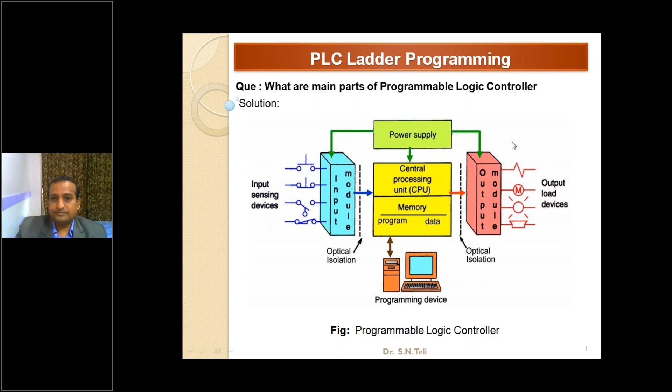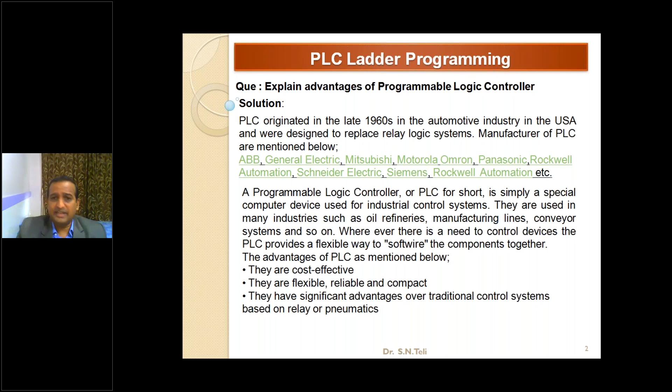Now the advantages of PLC are that it is cost effective. Cost is very less nowadays, flexible and reliable, compact. Okay, and many companies are there: ABB, General Electric, Mitsubishi, Motorola, Panasonic, Rockwell Automation, Schneider Electric, Siemens. Many companies are there. Even Indian companies are also available nowadays.

Okay, and latching I have already told. This is called a latching circuit. When S1 is on, the bulb is on. With B, the same name, the current is flowing on both sides. Even if S1 is off, the bulb is still on. When S2 is off, this is the push button I showed, it turns off. This is called latching. Latching is very, very important. S1 is a normally open switch. S2 is a normally closed switch.

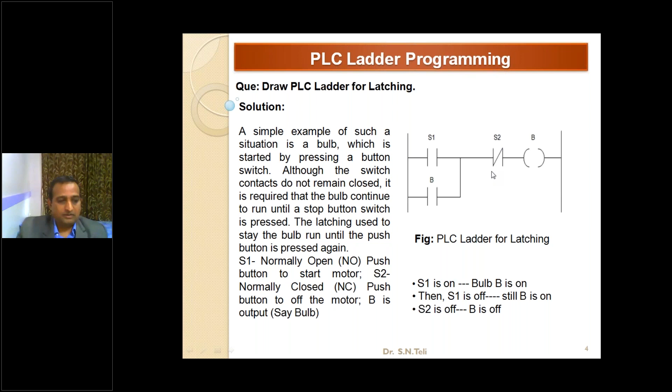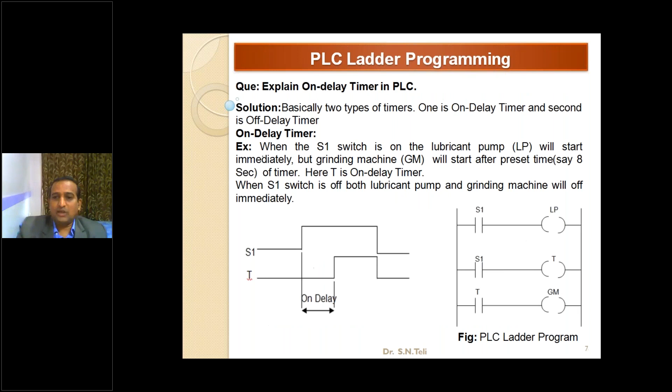And here A plus, A minus. A plus is the piston extending. When S1, A plus. When S2, A minus. Okay, so this is the PLC programming, ladder programming. And here A plus, A minus using latching, and here the on delay timer I have already explained, and the off delay timer, and the retentive timer where reset is required, and delay A plus, delay A minus. So this is A plus when S1 is on; when it goes to S2, the timer will start. When the timer gives the output, then A minus will retract.

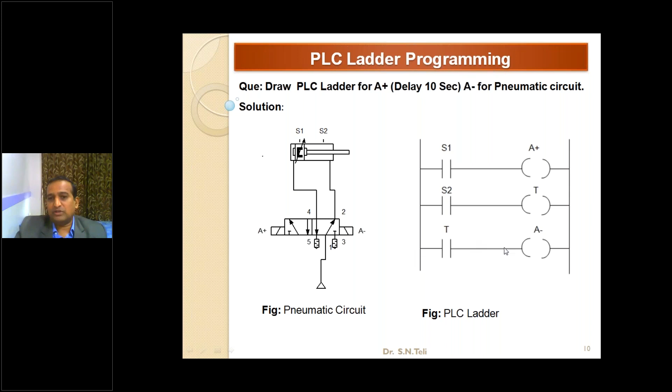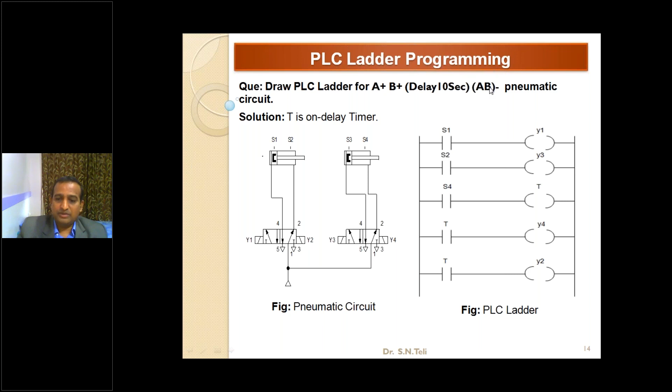So like this, I have developed many logics with 2 cylinders, not only 1 cylinder: sequencing of 2 cylinders, timers. And this is very interesting, slightly complicated: A plus, B minus, and A minus. And A plus, B plus, delay, AB minus. In the bracket, AB minus means at a time. Okay, I'll show the animations after the PPT.

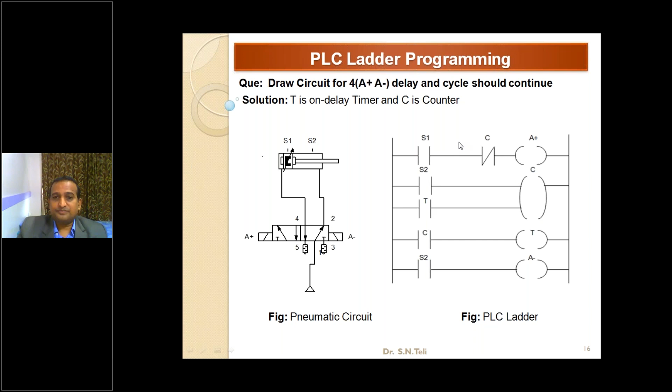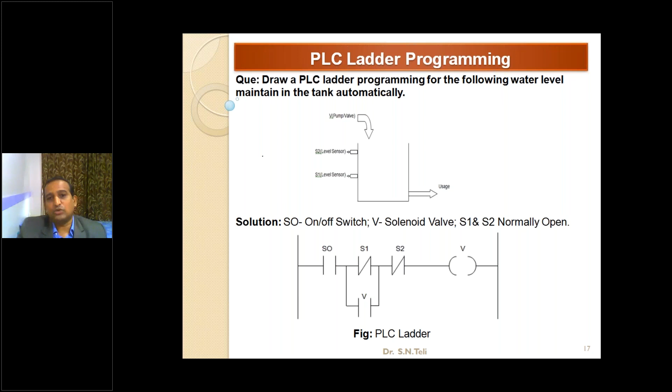So counting. Just now I showed the counting. You can do the same programming I showed in electro-pneumatics in the PLC also. And even for tank processing, maintaining the water level in the tank with S1 and S2, the pump will automatically start. There is no shortage of water, and so many applications.

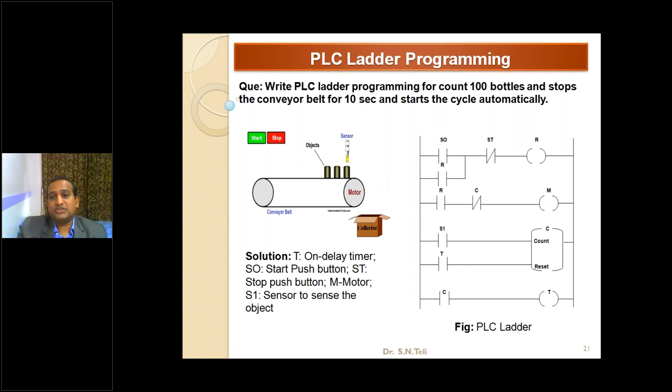So I have written the programs, and all the programs are run by software. I have checked and validated them with the software. So these are all, the stamping machine, PLC programming. And now we'll start the software.

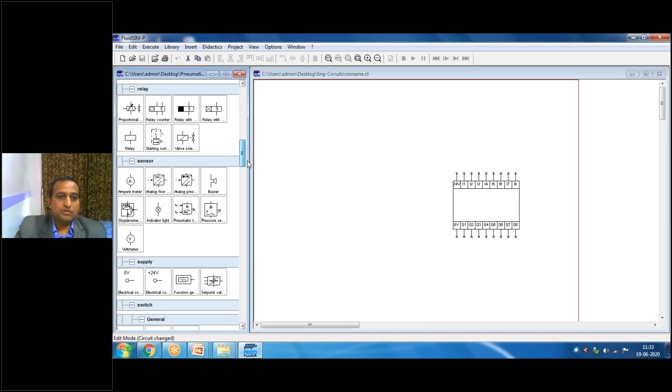Okay, so finally we have arrived at the PLC, programmable logic controller. Here the PLC is available. You can select any PLC. The PLC requires 24 volt and 0 volt. Without 24 volt and 0 volt it is not starting, because this is also a passive element, and it especially requires DC volt, not AC volt. 24 volt and 0 volt.

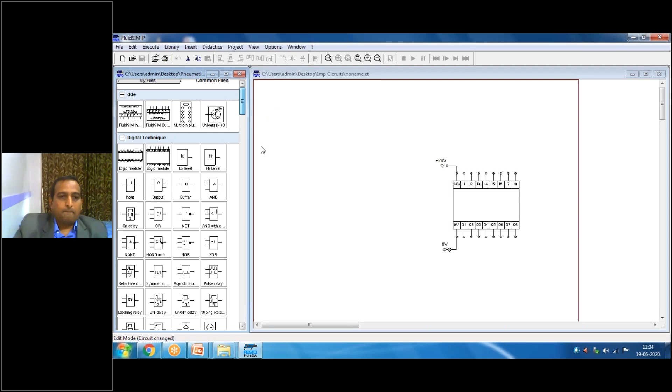Here it is showing I1, I2, I3, I4, I5, I6, I7, I8 are the inputs. Now I'll take a piston and cylinder, a double acting cylinder. Once again, I'll label S1 and S2, 0 and 100. For S1 and S2, suppose I'll take an inductive or a magnetic sensor. Here, magnetic sensor, S1 and S2.

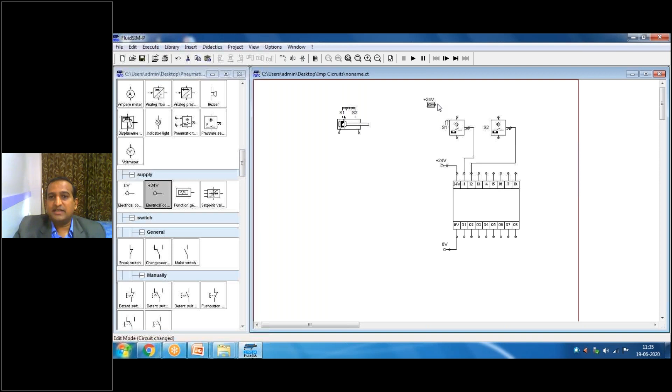In the sensor, there are 3 wires. This sensor is S1, this is called S2. This is the sensor output; the pulse is showing this output. I1 I have attached to S1, and I2 to S2. 24 volt and 0 volt are required for the sensor, and here also you can use the same 24 volt and 0 volt. This is the sensor S1 and S2. And here the valve is required.

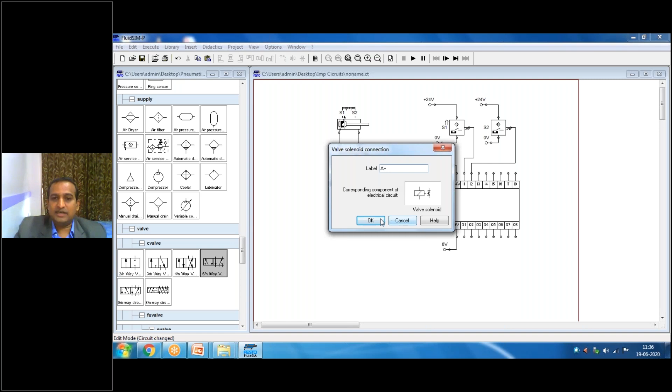This is the valve you are familiar with, 5x2. So I'll use a solenoid valve, 5x2. This is the symbol for solenoid. I'll write here A plus, and here A minus. And here I'll give the supply, compressor, and FRL unit: filter, regulating of pressure and lubricating the air. And here there is a muffler. Fine, A plus and A minus.

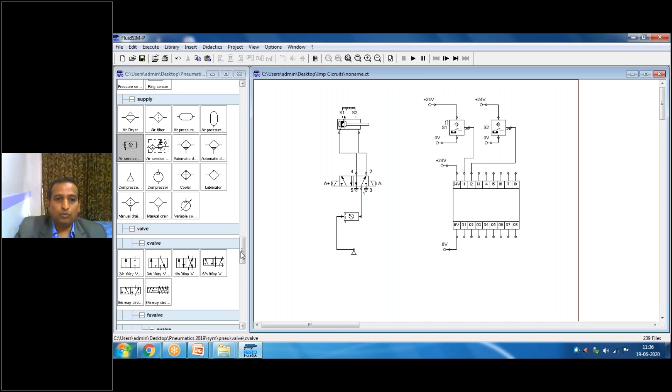These are the PLC inputs; I have interfaced inputs from the sensor. Then the output from the PLC goes to the solenoid valve. Here 0 volt is required, and naming is also required: here A plus and here A minus. Now you can see the PLC and the pneumatic system in one screen. I have interfaced the pneumatic system to the PLC; the inputs come from sensors and the outputs of the PLC are solenoids. But it is not working because it is just a black box.

You see here S1 is on now because of the magnetic piston and magnetic sensor. It is giving a signal to the PLC, but the PLC is blank now. You have to write the programming. What do you have to write? When it is at S1, A plus should be on. When the piston is at S2, A minus should be on.

Double click and you will get the ladder programming. I1 is nothing but S1. Q1 is nothing but A plus. I2 is nothing but S2. Q2 is nothing but A minus. The programming is over. You have written the program. Just come here. Now you see the operation by interfacing the PLC. PLC is very easy compared to pneumatic and electro-pneumatic.

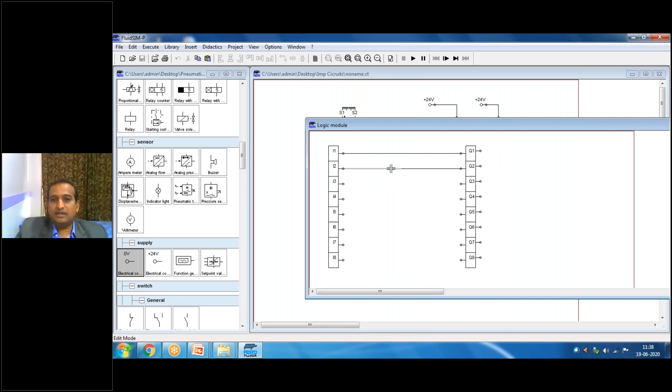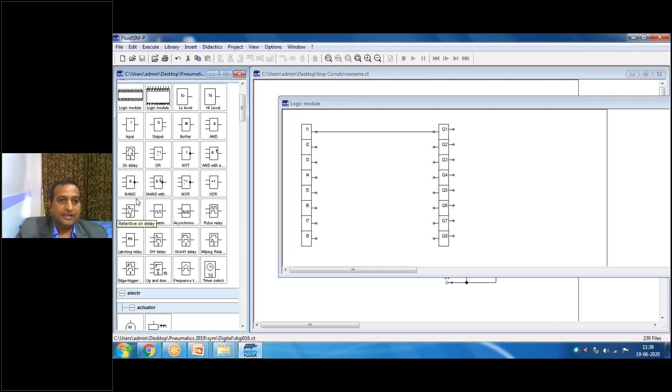Okay, suppose I'll keep an on delay timer. Below the PLC, all the timers are available: AND gate, output, off delay, on off delay, retentive, and on delay. Here there is an on delay. When it goes to S2, there is a timer. Suppose you give 3 seconds, or 4 seconds. Now come here, run the animation, and it stops for 4 seconds through the PLC.

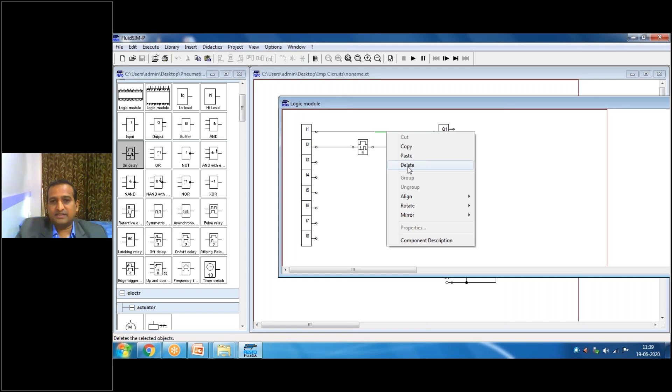At S1 I have not interfaced the timer. I can put one more timer because these are all soft timers. In electro-pneumatics hardware timers are required, but here soft timers are used, so the PLC is always better than technologies like electro-pneumatics and pneumatics. Timers are freely available. Just set the timing, suppose 4 seconds here. Now you see the 4 seconds, and the red line shows the supply going. Now S2 is on, S1 is off. 4 seconds and 3 seconds.

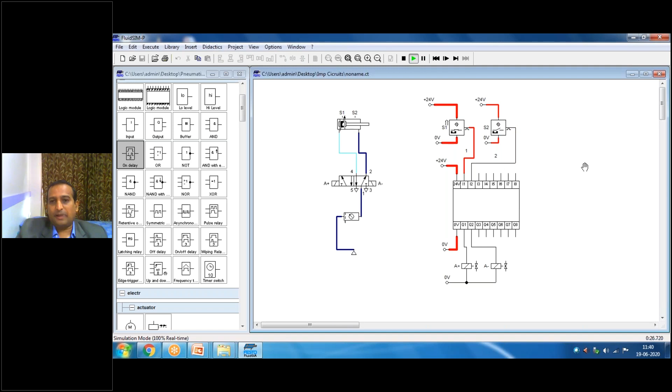Suppose I can use a counter also. The previous program, whatever I showed, I'll show by counter. So this is how the PLC is working. If you double click, you can write the program. One ready-made program is already open.

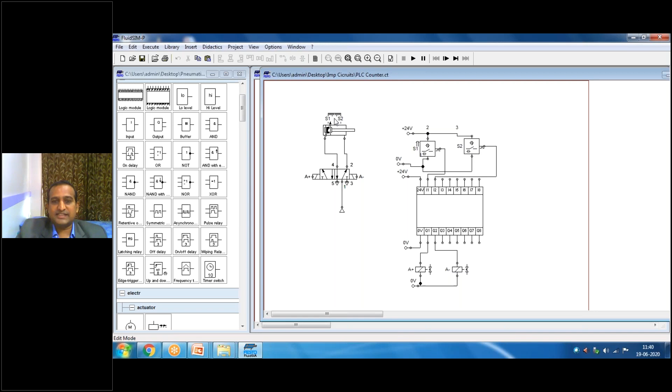Yesterday I made a PLC counter. Already this program I showed by electro-pneumatic. Same PLC, S1 and S2 sensors, A plus and A minus are solenoid valves, but the programming part is this. Because this is FBD, this software has a limitation. Because it is freely downloaded software, no ladder programming.

FBD, this is block. You see that AND gate, and this is a counter, 3 is a counter. You can set 4, and NOT gate, and this is the timer. So you can write a program. Now you see here, 1 2 3 4. You see in the programming, the counter is 4 and delay time is 3 seconds.

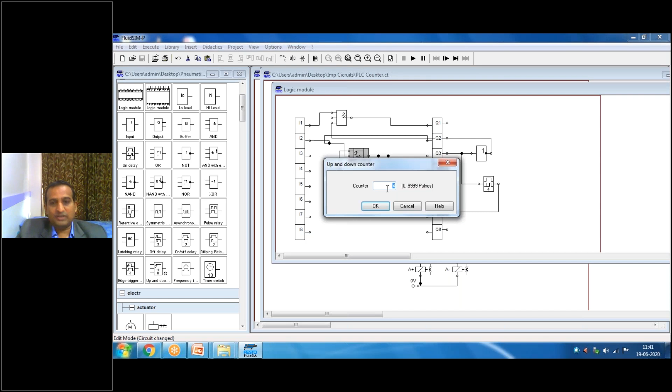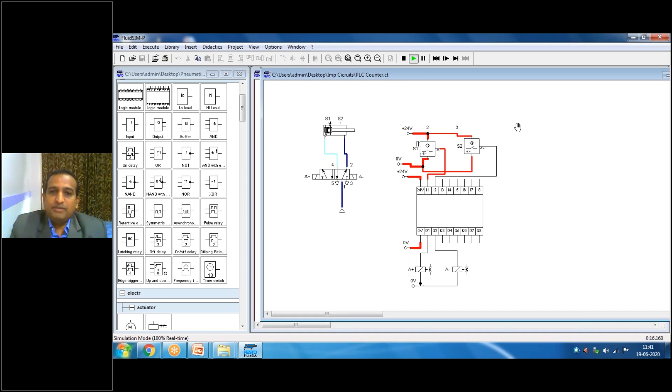Instead of 3 seconds, I can go for 4 seconds, and instead of 4 counting, I can go for 3 counting, and automatic resetting. Everything will be automatic through PLC. So like this, this is a virtual lab, and all the concepts will be clear. You can develop any logic, 2 cylinder, 3 cylinder, 4 cylinder, bulb also you can attach. I'll show a bulb. You can interface the PLC with a bulb also.

Suppose I'll remove piston and cylinder. Suppose electronics students are there. They want a bulb. I'll take only 5 minutes now. The remaining time is 5 minutes. Within 5 minutes I'll complete.

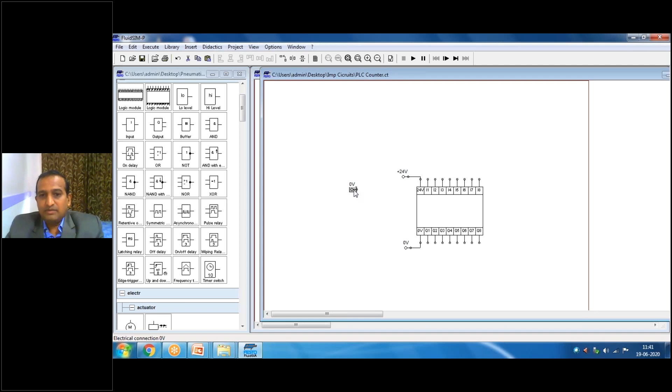Suppose I'll use a switch. Suppose a detent switch I can use. When this switch is on, the bulb should be on. A 24 volt bulb is required. Supply is required for the switch, and this is the bulb. Output is a bulb instead of a solenoid valve. Now the bulb will not be on because I have not written the program properly. So I'll write the program.

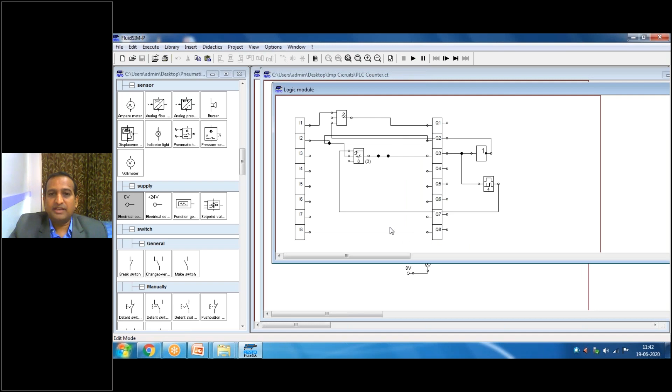I'll remove the entire thing. Simple thing is, when I1 is on, input is on, output should be on. This is the program. Now you see here, when input is on, output is on. If I have not written anything, the PLC is not working because you have not given any knowledge to the PLC. It is just taking an input, not giving any output. So that you have to give.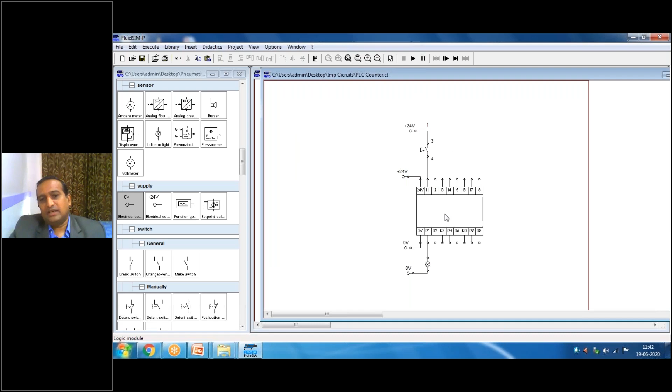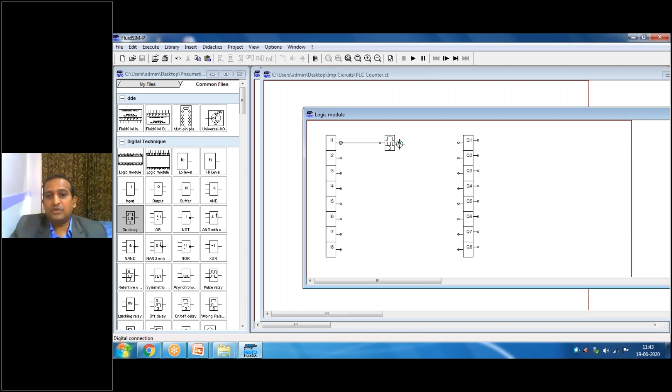Whenever I switch on, the bulb should be on after 3 seconds. You can give the on delay timer. So even when I switch on, the bulb should be on after 3 seconds. Just you see that. As soon as it is off, it will be off because it's on delay. But whenever I make it on, it should be on after 3 seconds because I have attached an on delay timer in the program.

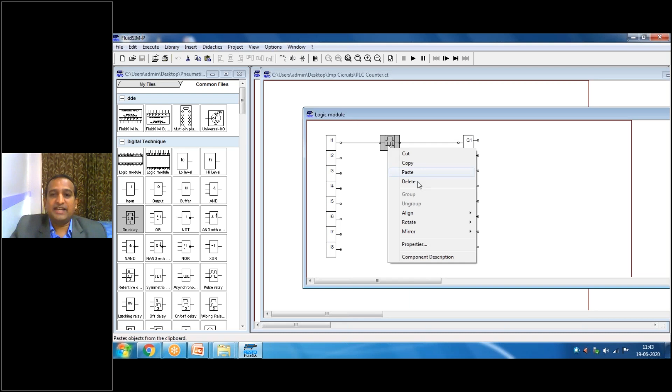Suppose I can attach an off delay timer also. Here there is an on delay, and off delay is also there. Suppose off delay. Where will I give the input? Just by trial and error method you can give the input, otherwise you can cross check here also.

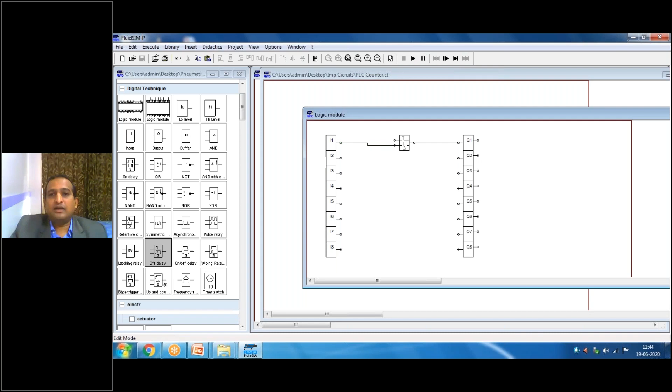Suppose by mistake my input is here below. Then it is not working, and output is not on. So you can change the input. You can see the simulation here also. The main simulation you can see here.

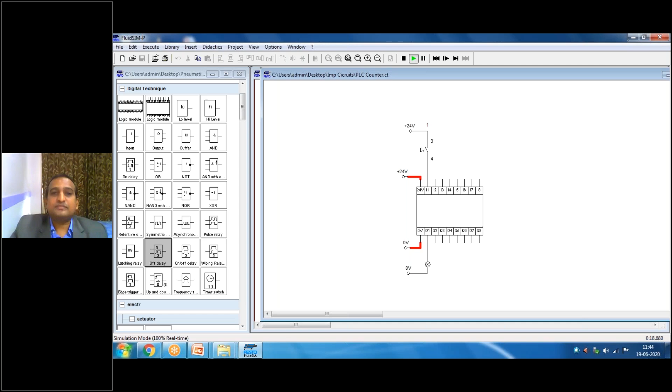As soon as I make the switch on, it is on, but it is an off delay timer. Whenever I make it off, it should be off after 3 seconds. You see here, the switch is off, but the bulb is off after 3 seconds. So this is the way to interface the PLC to the inputs and outputs.